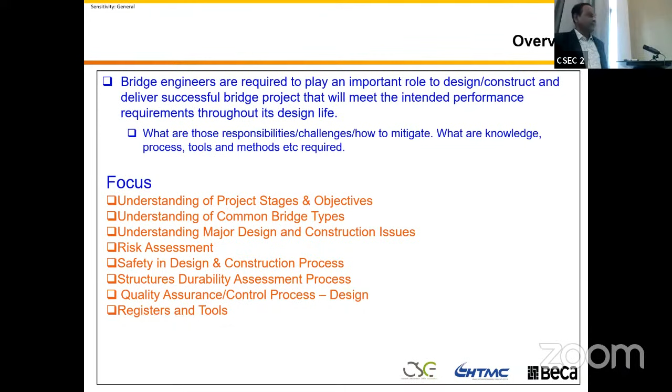So before you hang the photograph, you need to find the photograph. Someone has to draw it, right? There should be an artist, like a client — this is the client as well.

When you buy the photograph, you need to have an agreement. You can have an easy agreement between stakeholders, but it's very difficult to have agreement between us — trust me, you'll get to know this someday from your own experience. This agreement is really hard, deciding which one to buy, because otherwise you buy it and I don't like it, and I ask you to change it to what I want — there will be issues later. There are stakeholders, and you need to get their agreement.

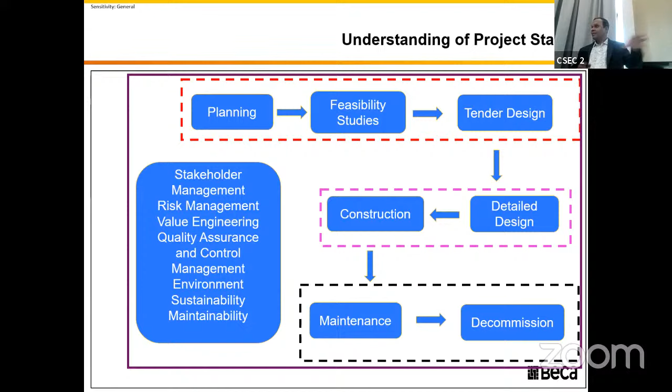These are the main elements in the project stages: this is the procurement stage, this is the design detail stage, this one is the maintenance stage, where the people are going to use it. If you look at the photograph story I mentioned before, you can link the same thing here, but on a larger scale. I just put this slide - we have seen this before as well.

When we were doing a project, you need to understand what the objectives of the project are, especially for a highway. When you're building a highway or roads, the main purpose is to improve road safety - please remember that, that's the main purpose we are doing. And then improve the efficiency of the highway between proposed destinations - efficiency meaning you can drive safely without difficulties like traffic jams, and reach your destination as quickly as possible.

Then, when you are building bridges and roads, you could see around the country the economic development. Especially you can see between these highways opening up in the country, economic development, like especially land values - they go up like tenfold, I don't know how much, but yeah, it's really the impact on the economy.

And then when you design everything, it needs to provide value for money. So you can't spend 100 million if you can build it for 80 million - you need to make sure you build it for 80 million.

And enhance the potential beneficial economic effects, manage potential adverse environmental impact. Because, for example, when you're constructing something across a river, you can't just go and build a dam or something. You can't go and put all the piers in the bridge, like 10, 15, 20 piers over the river in the waterway. You need to make sure that river - people use it by boat, sometimes, not common in Sri Lanka, but in most countries they use rivers to transport people. Sometimes they allow ships to go under the bridge, so in this situation you need to make sure you consider those things.

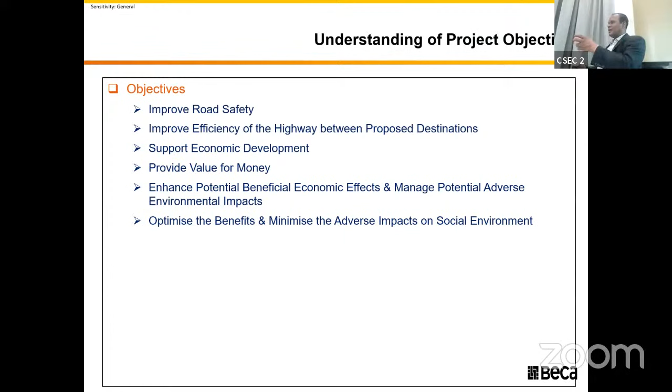I'm giving very simple examples, not very complex ones.

Then when we are doing the work, we are always bound by the contract. So the contract types we use in design - we call it design-construction type. Construction to the client design, you do a detailed design, and then there's the alliance between the designer, contractor, and the client.

A client work together alliance. The other one, public-private partnership. This project is invested by the company, private entities. For example, you heard a lot of talking in Sri Lanka that foreign countries would like to invest for the elevated highway, but they collect the money from the toll. You have to pay the toll. So those investments, and then you need to work.

So what I try to say in summary, when you design anything, it's a different level when you become a senior engineer. Then you have to deal with this kind of documents, the contract documents. You need to make sure that your design and your compliances always comply with these contract documents. Sometimes you start your career and you do calcs and designs, but when you go up in your ladder, you have to deal with them. In the office, we deal with them. There are a lot of issues that come up. When you try to solve them in court, it's going to cost you loads of money. And in addition, there are a lot of risks associated that you will see later on how we're going to mitigate.

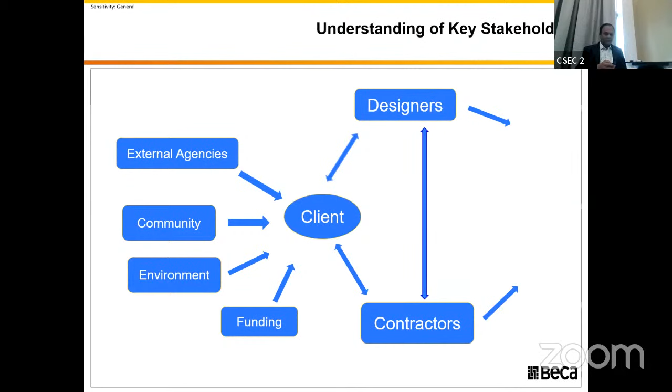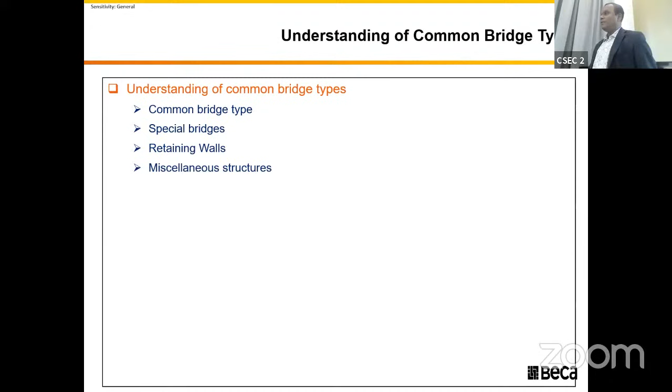I'll just put this slide, understanding common types of bridges. You should know what you're going to build first. But I'm not going to go into this in detail, the simplest form, because in my bridge design lecture series we covered this in very detail. For the sake of completing the presentation, I included them here.

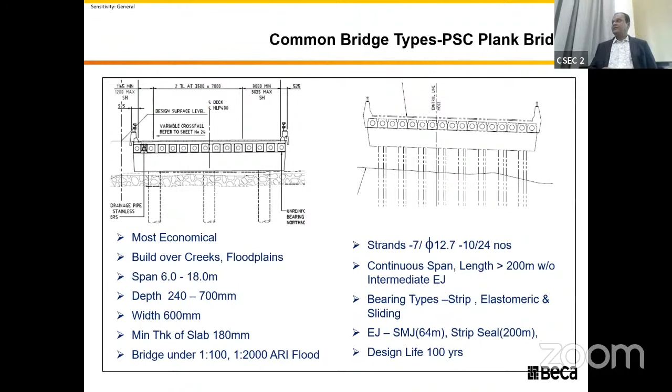The common bridge type, the simplest and cheapest form, is the PSC plank bridge. You can see it can go up to a few hundred meters in length, even kilometers. In terms of construction, design and cost, this is the cheapest form of bridge.

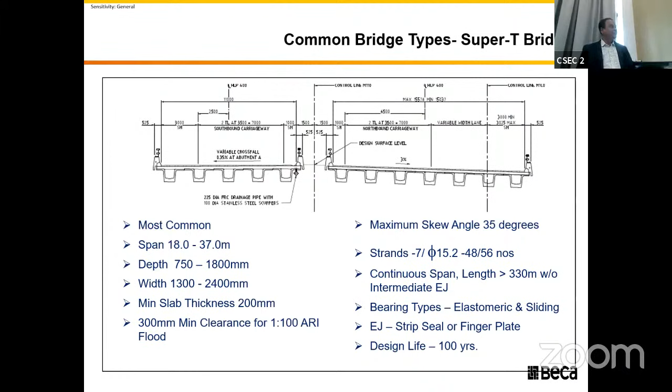Then I-beam or Super T bridges. This is very common in Australia, one of the most common types there. 78% of bridges are designed using this method. They use the longest one, I think a 3.5 kilometer long bridge, using Super T with a 30 meter span, up to 120 plus spans in the bridge.

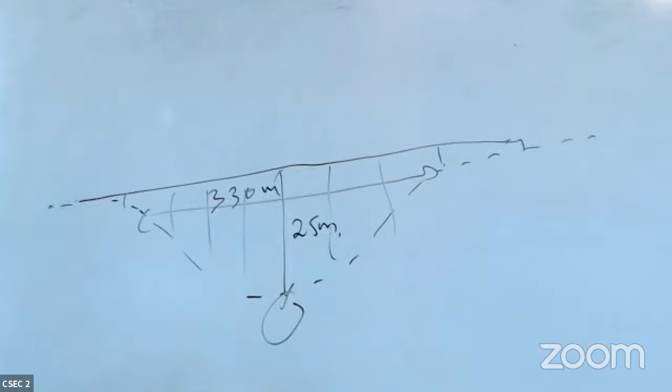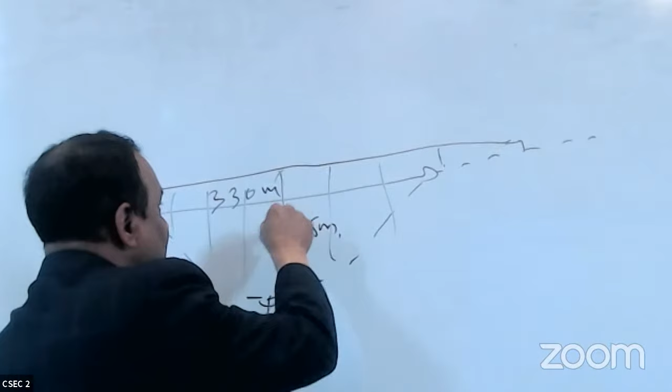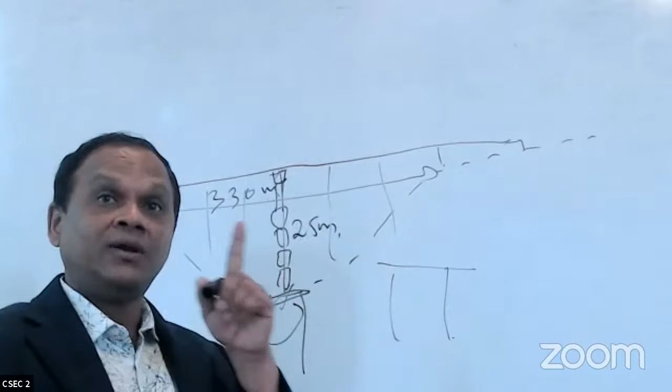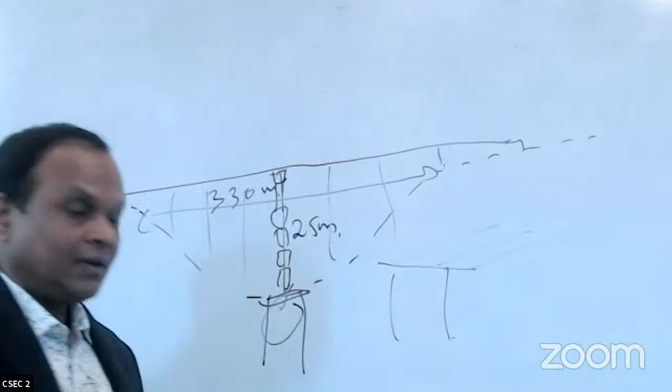So you need to bring the machines in here, right? Once you bring your machine, you do your pile, you do your footing, you go up the column 25 meters high. When you are doing here, you're all good. Then you go to the top, you have your cross beam like this. Once you are building the cross beam, people are working 25 meters above ground - you need to make sure they can construct this. So once you construct that, you need to erect the girders like 25 meters above the ground. You need to reach them.

That's what I said - bridge engineering or any engineering you deal with, like designing a very tall building. It's okay for a 2-story building, but when you go up you can see the logistical issues you are facing, the interfacing issues you are facing. You need to make sure you consider all of them when you are designing.

But I try to say, listen to your mates - they're from geotech, they're from drainage, they're from utilities, they're from highways, they're from services, they're from urban design. You have to listen to your architects too - they may say we need to have this, it's a heritage issue, you need to put that stuff on the bridge.

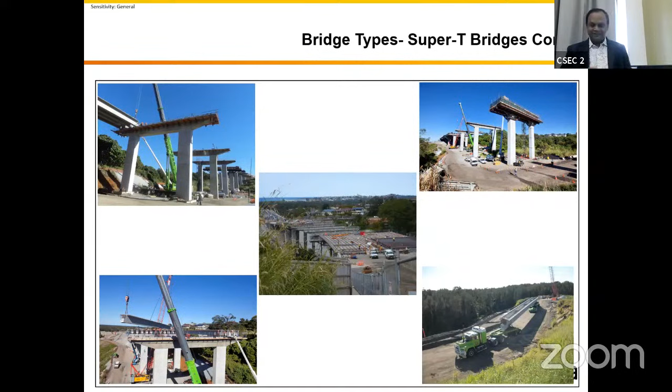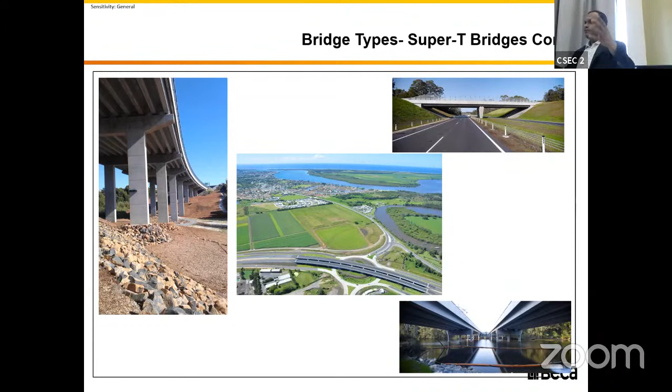You can see how beautiful it is when you build something and it matches with the surrounding. Yeah, that's what we need.

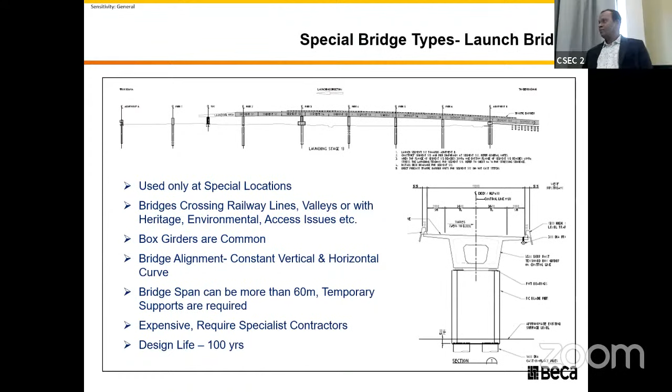It's a massive process but it's a very simple thing - you build the bridge and you push it. It's like pipe jacking, you heard about pipe jacking? Exactly the same thing - pipe jacking does it underground, launching bridge does it above ground. There's a difference, but the principle is the same.

When you are an engineer, always think about what is the basic principle we're going to apply. Always think about this - this guy came and talked about hanging a photograph all the time. That's a story you need to take home.

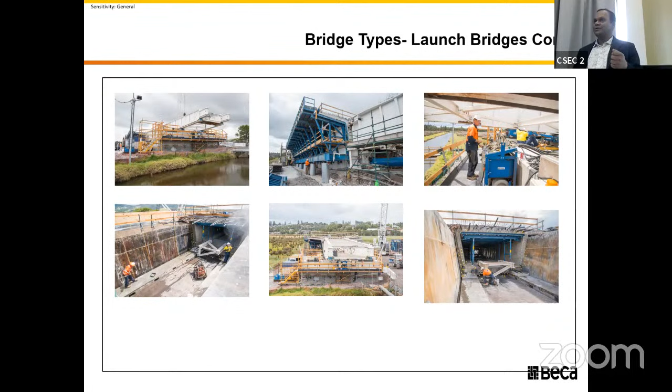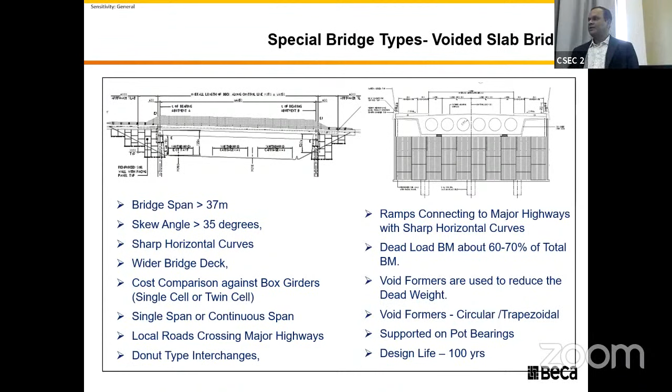This bridge type I never recommend - in Sri Lanka you're never going to use it. It's called a voided slab bridge. In terms of current sustainability design requirements, we can't use them because these bridges are very heavy and need a lot of concrete and a lot of prestressing tension. This type of bridge is still used in Australia because of the labor cost, but it's not the one for Sri Lanka, though I still include it. The reason is, if you go to sustainable design, from the list of bridges you propose, they will take that one straight away off your list.

Then you can go to more complex bridges. I think you've already seen the one now over the Kelani, near Parliament - a beautiful one, right? A cable stay bridge with a balanced cantilever. I think you've seen this kind of interchange while driving on highways now in Sri Lanka. In the future we need more - yeah, you can design these.

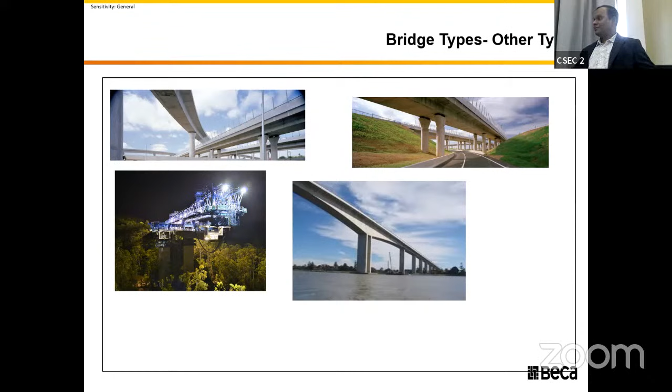When you are designing bridges - not only the bridge, but the highway project - it's always a cut and fill business. Our highway engineers, when doing the design, try to balance out cut and fill. But when we were constructing a bridge, we needed to excavate a certain area. This particular project, we had to excavate about 20 meters maximum depth, about half a kilometer in length.

So we needed to identify how to excavate that element. This is about 30 meters wide, and this is the rock. We need to come up with the best possible retaining structure solution to solve that problem - otherwise it's very expensive.

Like in the city, when you're designing a building and you go to the basement, you keep going down to get the car parks and other amenities. When you are building, you're constructing right next to another building, so you don't have land to play with. Then you have to go with the best, most robust design solution, like a contiguous pile wall.

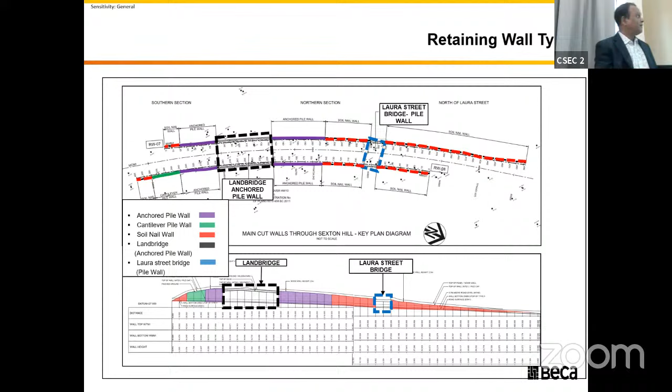But for example, in Sydney we are very lucky - we got sandstone everywhere, you can cut this shape like cheese. It's very easy, and it's cheap as well. You don't want very expensive retaining structures. In this project, we have many retaining structures.

One of the newer retaining structures, which you may not have seen many of, we call the soil nail wall. It's very easy - you excavate the soil, you put a nail, and then shotcrete. Think of it like this: if you want to attach 4 or 5 pieces of paper to a wall, you glue it and nail it. But if it's a piece of timber, like a series of photos, you have to nail it to attach it.

So when you are excavating the wall, here's what happens: when you excavate, this bit of the soil is unstable, it's trying to fall down, and this nail will hold it back. It's like when you cut a tree, put a rope on top, and pull it down - same principle we use here. We have that lifetime experience, that's why designing this stuff for us is very easy.

Go and try that one at home. Yeah.

Make sure your parents make all of them insured before you do that.

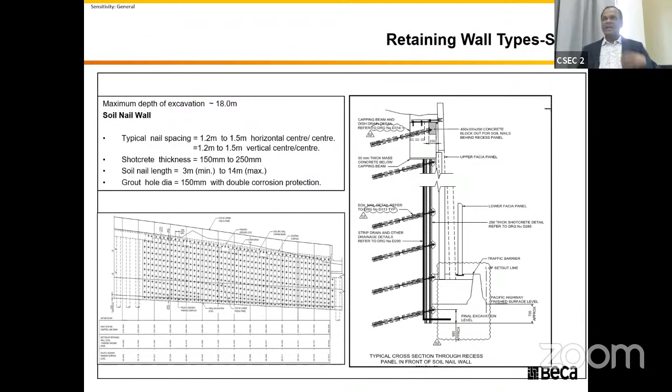Right, and once you keep going down, you can excavate this and keep adding the nail. This design is the beauty of collaboration between structural engineers and geotechnical engineers. This is one of the cheapest retaining support solutions for deep excavation. Wherever possible, we use this solution, because you excavate, drill a nail, put shotcrete, drill a nail, shotcrete - you keep doing that. So you don't want to build a massive contiguous pile wall and anchored pile wall system. This is the way they build it. You can see it's drilling, this machine - 1, 2, 3, 4, the 5th one they were drilling.

We designed this one with a 150 millimeter diameter hole, drilled at a 15-degree angle. You can see this is the retaining wall, we use galvanized steel for the soil nails, but in addition we use a double corrosion protection system to make sure this retaining wall lasts a minimum of 100 to 120 years without any maintenance.

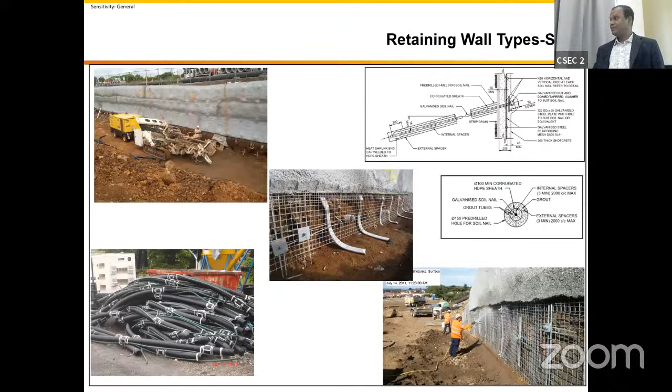Another type, used in some motorways, is what we call the reinforced soil wall. We use soil nail wall for excavation, for the cut, but we use reinforced soil wall for the fill. For example, in this picture, you need to elevate your road, so you need to fill. When you are filling, this is one of the cheapest forms of solution - the principle is what we call mechanically stabilized earth or reinforced soil wall, different technical terms.

If you think about this, the design principle is like a rigid block retaining wall - you consider this whole thing as a rigid block. In retaining wall design, what happens is very simple. Geotechnical engineers always talk a lot, but they do a very simple calculation.

You get soil pressure in a triangular distribution, and water pressure in a triangular distribution too. This force will push this one that way, or else it tries to rotate it. If your weight is good enough, it can develop restoring moment. The weight is sufficient and the friction between the surfaces, soil to soil, will prevent this one from moving.

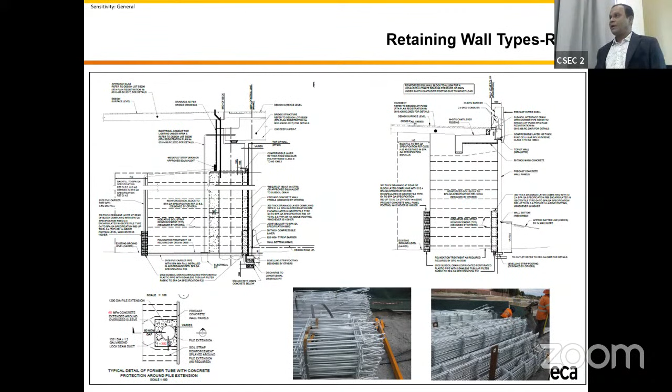The performance of this particular retaining wall mainly depends on the quality control and quality assurance of the site - the type of material you use is very important. You can see this picture while we are building this retaining wall, the type of material - this looks like no-fines concrete here, just roller compacted. It's very important to make sure of this, otherwise the system will collapse because you've got a lot of water building up in the back. Over the years it will slip, and once it slips it will take away the rest of the soil retained behind it.

Once you do that, you get a nice outcome here. Other structures - I think these are not common - are arch bridges, culvert arch bridges, the precast arch.

Is it common in Sri Lanka? Underpasses - yeah, and because of safety and other reasons, now it's not common.

Are they because of the unstable force? Yeah, that's one reason they don't allow it. We know they are not common. Yeah, and there are safety reasons too.

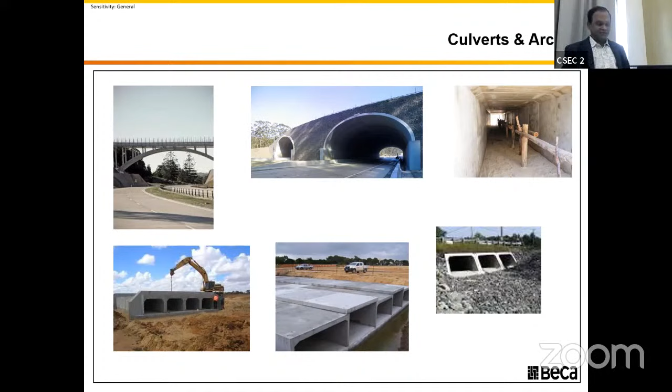Yeah, you have a lot of box culverts we use. This is one of the cheapest forms of construction, anywhere, because it's much cheaper than building bridges. You put this shell, then you put a link slab on top and backfill. You can backfill up to 15, 20 meters above this level. Some very, very strong structures—because it's a shell structure, right?

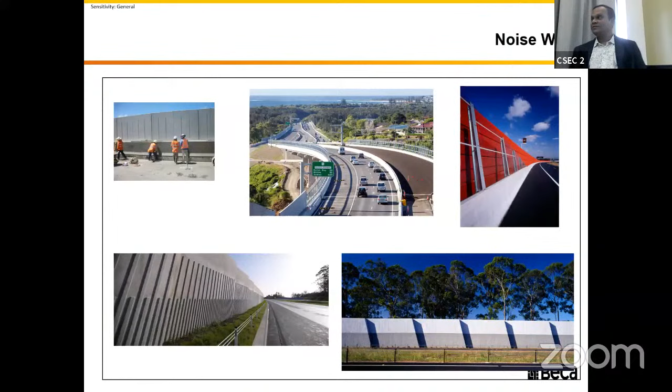And this is the other road furniture and so on. The noise wall—sometimes you might see in some highways they put up noise walls. And another thing, quite common especially in highways, you have to put throw screens, because people might throw something when you are driving underneath.

If it hits your windscreen, sometimes people might die, because if that impact happens, the driver is going to go uncontrolled, then he might go and hit someone else, right? These are very important—these are the minor things.

When people design a bridge, you think the most important thing is to design the big girders, right? That is the bridge design—that's nothing, you know what, that girder is never going to fail. Trust me, right? Even if you under-design a bit, it's never going to fail. That kind of safety is built into there, right?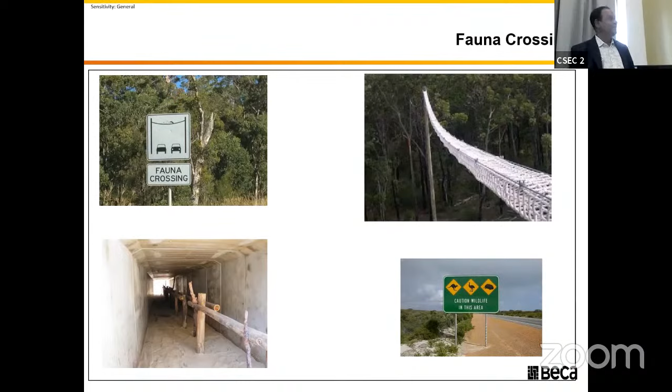I'll stop that part there, then I will go to more of a qualitative kind of discussion later on. Any questions up to this point?

Yeah, we do a risk assessment. For barriers, we have 3 basically: low performance barrier, regular performance, medium performance, and high performance barrier. This is related to what we call the MASH test, because they do a real-time test with a certain truck at a certain speed. Those MASH tests categorize TL 1, 2, 3, 4, 5, 6. For example, the medium performance barrier is equivalent to TL5, and the regular performance barrier is equivalent to TL3.

I don't have this information with me in this presentation, but I can send it. We can do a risk assessment—in my presentation I discussed that in detail in the bridge design one. We do a risk assessment, then we can decide which barrier is suitable.

For example, if you design a car park, let's say we want to design a barrier for that car park here, because if someone drives through, he will end up in the creek or water down there. To protect that, we can design to suit, because when you're driving in a car park you're not driving at 60 kilometers per hour, it's about 10 to 15 kilometers per hour—sometimes maybe he didn't put the handbrake on and the car might slowly roll. So the impact on the structure is very different compared to a road traffic barrier on a local road versus a highway, where we allow you to drive at 100 kilometers per hour.

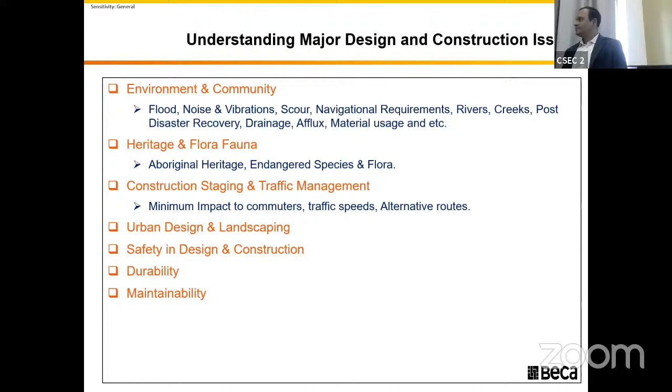There are a few questions from the audience. The first one is: what are the standards widely used for building bridges in Sri Lanka - BS or Eurocode? Eurocode is what you see.

The next question - someone says currently I'm working as a site engineer in a bridge project in Sri Lanka. In my project, we are using temporary sheet pile shoring to retain the soil and provide a safe environment in deep excavation. I think it's more of a statement than a question. He's just stating it would be very useful if I could know the quality and standards for temporary sheet pile shoring.

Temporary works design - there is no standard. The main reason is no one would like to write that because of the risk. If I write a code myself, and someone uses it, and if it collapses or fails, they will put me in jail for the rest of my life. As simple as that. Because of that, there's a massive risk involved.

Another thing - temporary work design varies place to place, person to person, contractor to contractor, client to client. There is no one way, one solution. Because of that, we design the temporary work for that particular case.

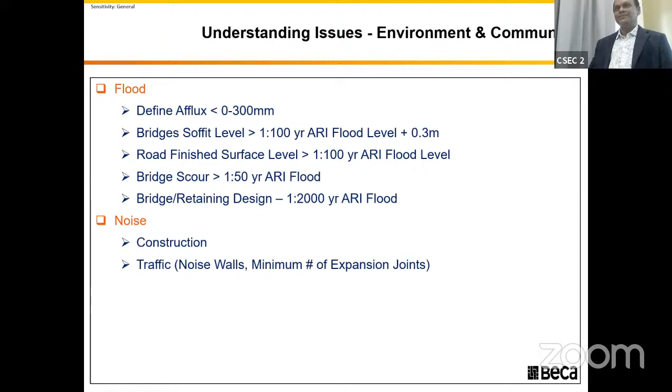Everything costs, that's what I need to say. You can't expect in Sri Lanka for us to do the same thing because we are still growing up. I'm sure when you all come to our age, you can do this stuff and learn how to do it, so we will help you to go.

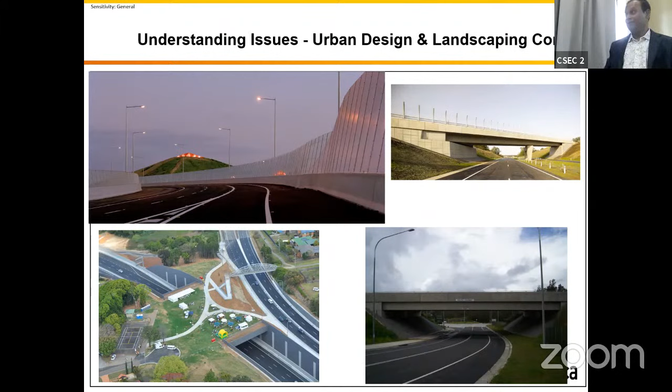Then the next phase of the work, I just want to touch base with risk. Everything is a risk. Even for you guys, having a girlfriend or boyfriend is also a first time, not like our time. Married close to 28, that's the new generation, right? So we are the old generation actually, but you need to understand we grew up in technology and everything, so we are a matured generation, and that's the way we need to choose.

When we do a risk, everything is a risk. Like the question asked, when you go and work with insurers, they ask what is the lifespan of the particular structure. You need to understand first what is the project life cycle of the structure - starting with concept development, design, and then continuing until demolition and recycle.

I think in modern day design, you need to make sure you estimate the amount of carbon you consume in your particular design. I think you'll learn about this a lot from Professor Priyan. I'm not going to go into this one in detail, I think I covered it in the first slide.

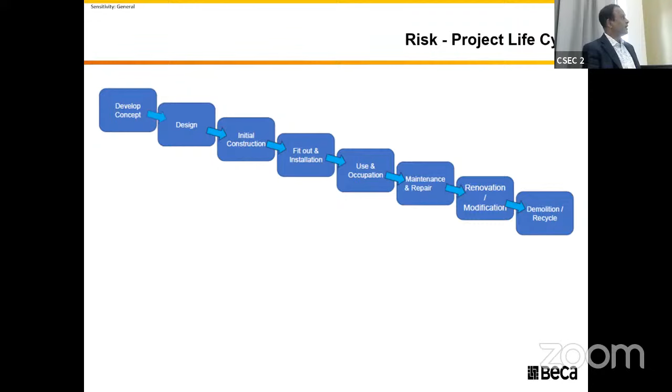When you're doing the risk management process, there's a standard we call ISO 31000:2018, which provides risk management principle guidelines. You need to first identify the risk, assess it, control it, and then monitor and review it.

I'll give you a classic example - how many people drive? You face this every day. While you're driving, someone crosses right in front of you, it's a hassle, you need to mitigate that. Even if you're sitting in a car or bus, it's still the same. If you're crossing at a traffic light location, someone can drive through the red light and hit you. You get injured, and you don't know the consequences - it could be minor, it could be fatal. That's the extent of it, so when we do engineering, we have to assess those risks.

For example, like I said about that Boga story - it's a massive risk. Imagine you ask a company, a foreign investor, to come and do that road. They get designers to design it, and the contractor's procurement forces select the one. Once you're about to go through halfway, someone says you can't go through that road anymore. It's not that simple to take a U-turn or turn left or right to come back and connect. That's a massive risk you have - that's one common thing, that's a community issue, nothing to do with engineering.

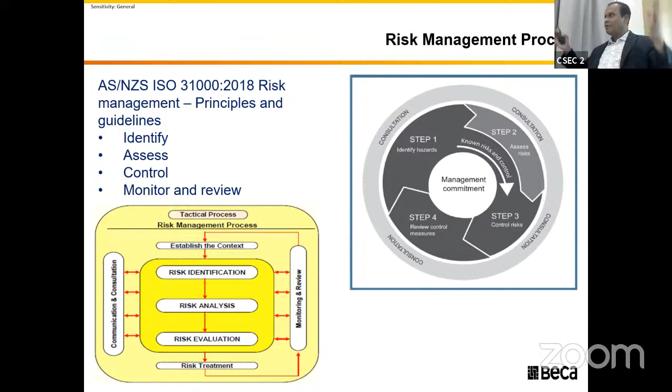When you do the risk assessment process, especially in engineering, we have a hierarchy: eliminate, substitute, isolate, engineer, admin, and PPE. PPE you know that. What is eliminate? Can you remove or not introduce an existing hazard? Can you remove it 100%? In terms of engineering and risk, you can't do that - you can't 100% remove a hazard.

No, but still, that's what I say - the classic example, like Sri Lanka, they clear the road for them to go from A to B. People think there's no risk, but it's still a risk. It could happen - you can't find a road without any pothole. It could happen, you can't eliminate it. If you say you can eliminate it, that's highly theoretical - you can eliminate maybe 99%, fine.

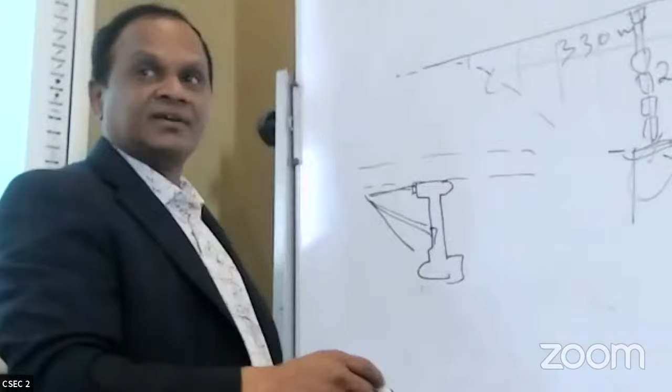So the other option, you can engineer additional safety features built in. For example, when you build a bridge, you've got the cantilever segment. To construct it, you need a V shape, two angle lines, to attach the cantilever system. Then you put your slab. In Australia, the way they replace this is the common construction. There's a risk when you are doing it, and that's the intention of the security.

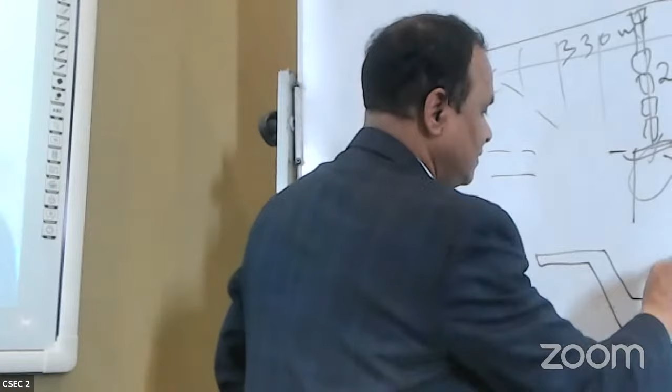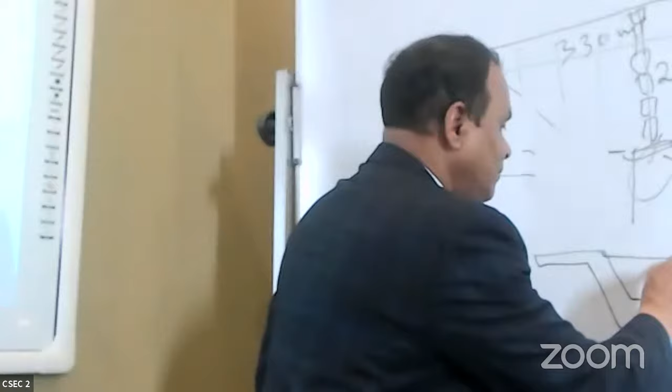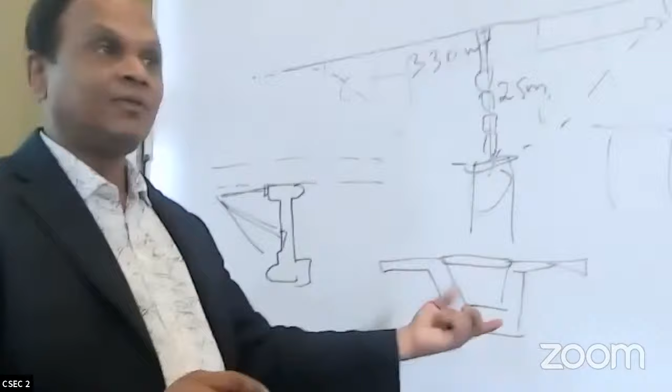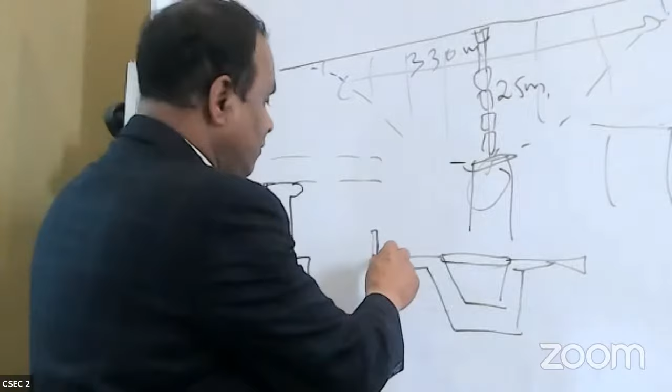This plan is your cantilever section. On the ground, this one we put permanent formwork. So once you place the bridge beam, you have a walking platform already, and no one is going to fall down. When you pour the concrete, you just need only the edge form, and we also provide bolts and ties to it.

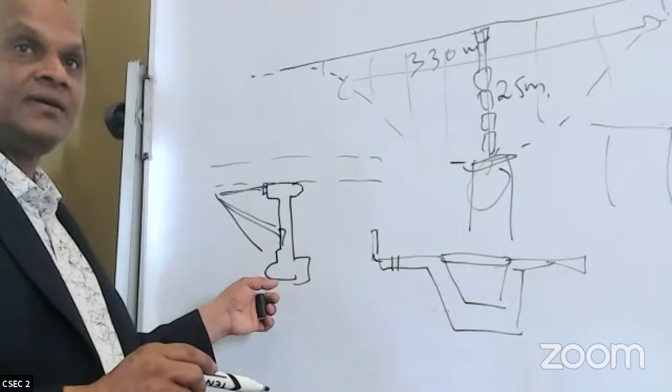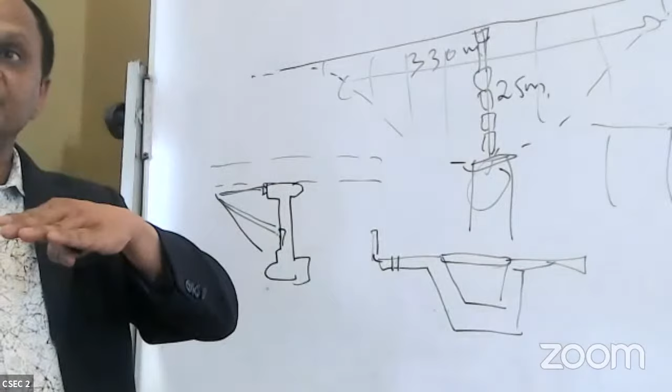In this one also, there's a risk to people. If you compare these two solutions, this one has a higher risk. To reduce that, you can provide brackets and things attached to the precast beam while constructing, reducing the risk rather than a person attaching that in the air. You can facilitate that, put beam posts.

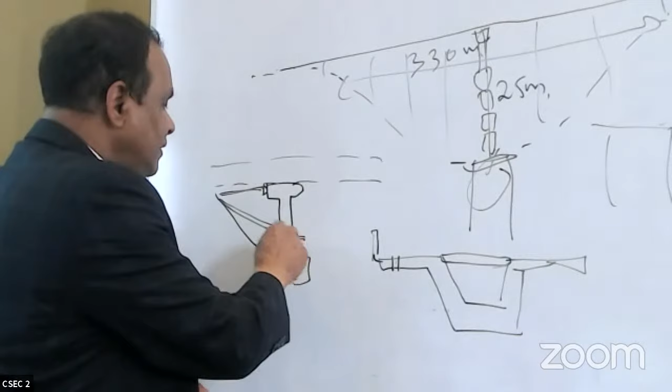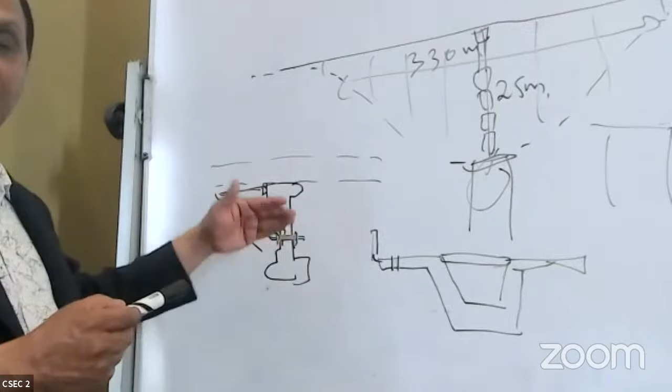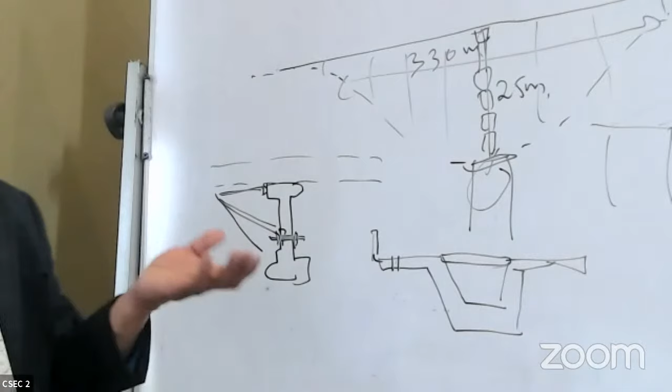You can put the rod in there and tighten that. You can connect this one as well. Then you can design it, place it in a proper way, and reduce the amount of work you're supposed to do on top of the deck. This is how you reduce the risk - you are not eliminating it, you are reducing it. This is the balance you need to look at when designing and assessing this.

I'm giving very simple examples. This is the engineered solution - we use this I-girder replaced with the super T beam as an engineered solution. Here, it does the same thing, acting as a bridge beam. I'll let the traffic go on top. Yeah, the super T, here.

We use the cement fiber sheet. Only one project I used plywood, but the next ones they use a lot of CFC sheets. But there's now again safety issues - when you cut the CFC sheets, the dust is cancerous. Then we can hopefully go back to timber again, you can see, right?

That's what I say, you can't eliminate it. CFC is okay, good, and durable, but when it's cut, it creates dust, and the workers' health is at risk. If you put timber, it's cheap and does the job, but later on it might decay and fall down into the girder. It could happen over the years, but still nothing will happen to the bridge because the load will be taken by the bridge deck. That's why we provide enough reinforcements, but still they think you must not be complacent. There will be a balance, and later on they might say you can use it, or they might come up with a polymer or something.

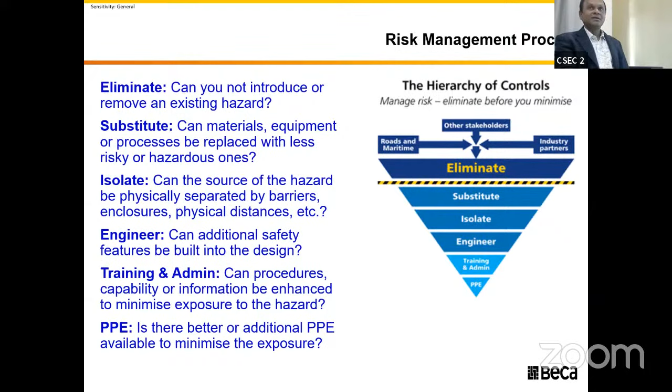When you do the risk assessment, like we discussed, we look at the likelihood, the probability. The classic example - when the green light is there, you can walk across the road, but I've seen many places with no green light, people still walk across the road, so the likelihood someone is hitting you is very high. When there's a green light for you to walk, you walk, and someone says no one is going to hit me - you agree? Someone can come and hit you, but the likelihood is very low. These are the two extremes.

These are the two extremes. What are the control measures we identify in this scenario? The people crossing the road in a safe passage - that's why green light. The other people crossing the road in an unsafe passage, anywhere they like.

Thankfully all the drivers in Sri Lanka are very good, quite patient and conscious. I encounter many - they jump across the fences and go across there, jump and then go across. Imagine when you jump, if you just lose focus, someone is just driving through. The people should not stop - they also drive. If you stop, someone else behind you will hit you.

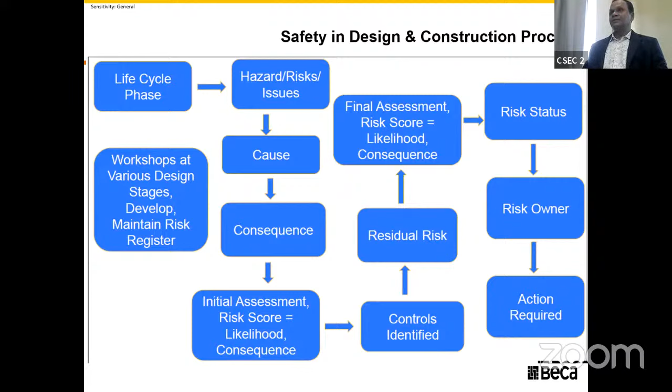When you do the risk assessment, we always have numbers. We engineers always play with numbers. This numbering system - you can say if an accident happens, it's insignificant, no injuries. The way you define no injuries: the first aid box we have in our offices, someone goes and uses the first aid box, or no treatment at all.

And then that could happen - likelihood is extremely likely. For a certain project, certain element, I'm not going to go into this in detail, it's very subjective. Some people put this one like a timeline. Some people put this as certain risk assessment cost - you will see in the next couple of slides. So then very likely, unlikely, significant injury, fatality.

So in this scenario, when we get this table, we categorize our risk into high risk area, medium risk area, low risk area. If you design your formwork system or a stair to climb up properly, and a person fell down from that - sometimes as you come down a couple of floors, it's extremely high. Sorry, the incident happening is extremely low, but it could be catastrophic or serious.

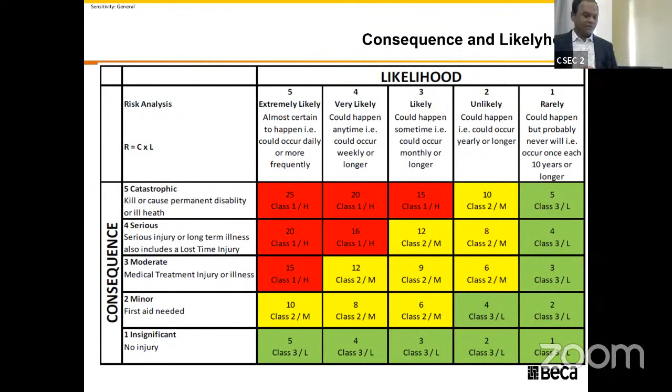This is something we need to teach when we are in school - not up to that extent, but the principles and concepts. I'm going to go through this one - these are different criteria we use to evaluate risk.

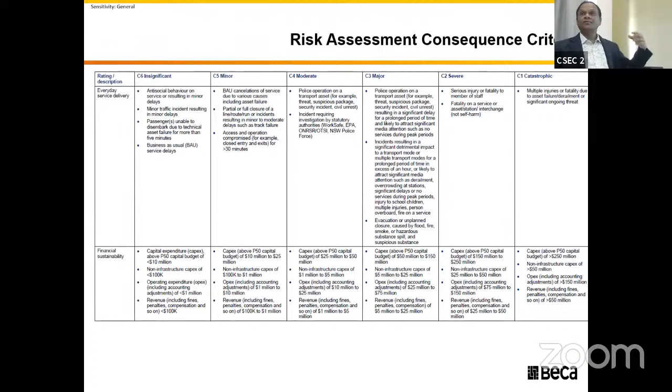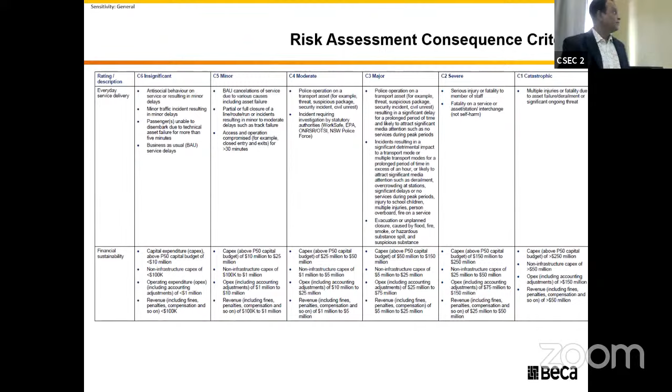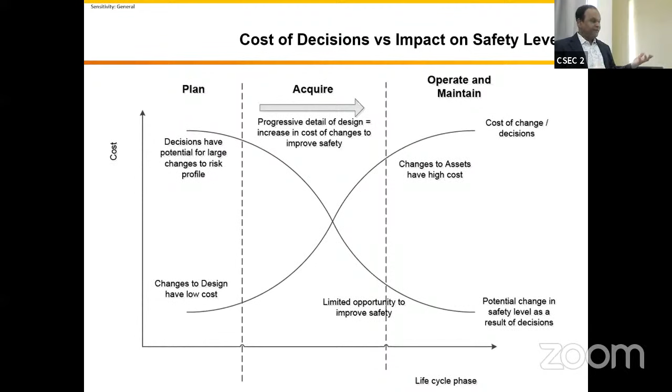Different categories - safety, and when we do the delivery, finance, like insurance, we deal with numbers. These are the criteria we use to assess the risk and manage it, because at the end of the day everything we translate into dollars. That's why we do it - so you get proper decisions in the risk assessment throughout the design life of the structure, and the life cycle cost of the structure stays very low. If you don't consider that, that's where you're going to end up. That's why engineers in the Western world are so conscious about risk assessment - not just to save someone's life itself, but for their own benefit. That's the advantage. We need to take this seriously and get that across.

It's almost 5 o'clock, right? So what should I do - can I continue for another 15, 20 minutes, or do I need to stop here?

If there are issues - for example, when building something close to the sea in Colombo, your exposure classification according to Australia is B2. You have to provide future cathodic protection provisions, meaning in the future you can pass electrical current through to reduce corrosion in the steel. To do that during construction, for example with a pile, you have to tie all the reinforcement together, because otherwise current will only go through one place. You need to identify that, incorporate it in the design drawing and contract documents, and maintain it.

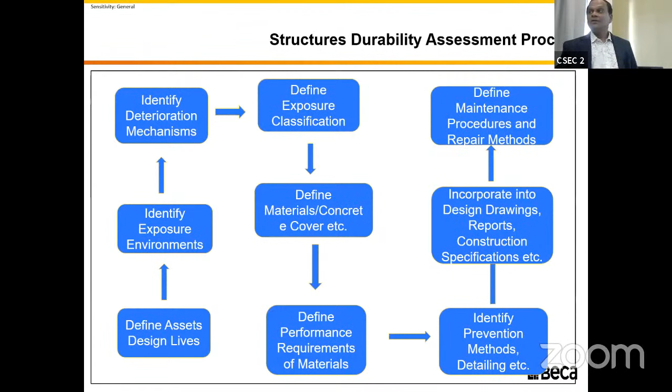This is contractually how we define design - a bridge is designed for a minimum of 100 years. But if you design an elastomeric bearing, it's only 35 years, because the bearing is always subject to unforeseen vertical load, horizontal load, rotation, and so many other things. There's a lot of risk associated with that. According to experience, it lasts between 25 to 35 years.

For concrete structures, if you have safety rails with protective coating, like in the railing, that's only 15 years - it's galvanizing, so these have a low design life. But the rest, mostly, we get a 50 to 100-year design.

They do inspections, but in terms of bridge performance, like the small joint seal, they need to replace it, and the bearing surface too. But a major element like the bearing at 35 years - you don't want to do that, because it's a really big cost. In a highway, when you replace the bearing, you can't stop the highway. If you stop the highway, you can see how much money they're going to lose - everywhere you drive, they don't give it free, it's 150 to 250 minimum.

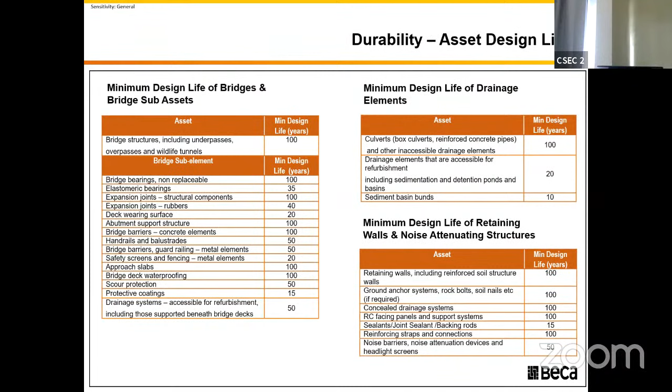For the replacement of the bearing - we replace all the bearings together, because for example if you get a 2-span bridge with 5 girders, you get 20 bearings. So when we want to replace them, we have to design for this at the beginning, because when you replace the bearing you have to jack the bridge. When you jack the bridge, you have to jack from the cross beam at the center. You need to jack from that point, so your girder will be cantilevered - the girders stay on the line, with the cross beam and deck, and they bear the replacement by jacking from this point.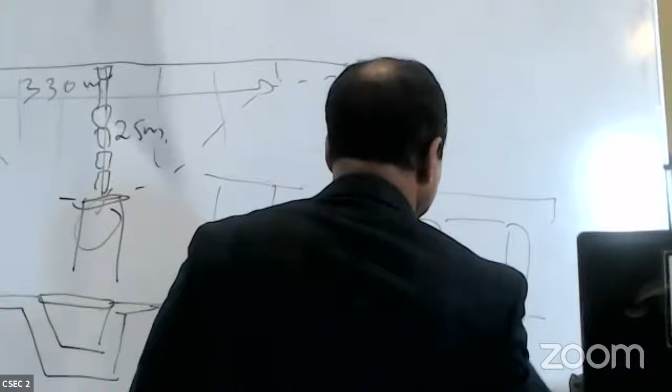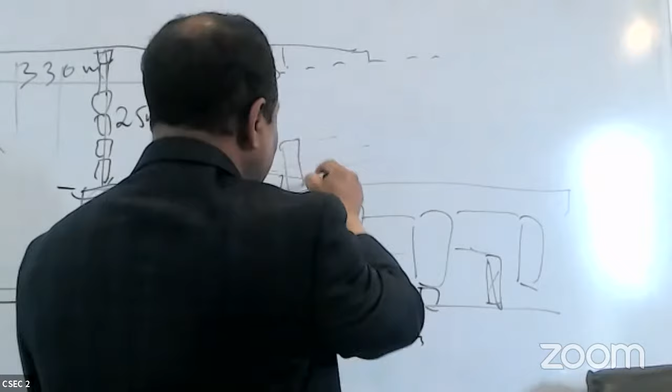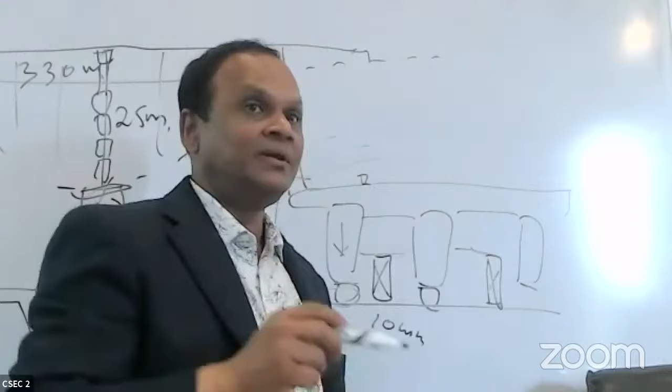You see, when you jack the bridge up, it's about approximately 10 mm. This whole way, including the barrier, is cantilevered. But we still let the traffic go. Normally we close the shoulders and reduce traffic speed, there we reduce traffic speed from 100 to 40 kilometers.

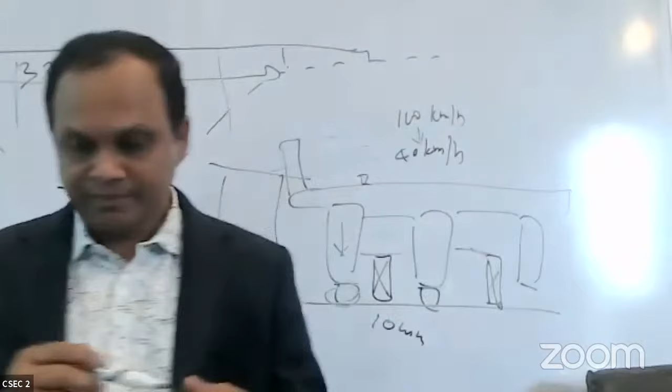Because it doesn't matter in a highway, while you are replacing a bearing, you just on one bridge reduce the speed, so you are driving 100 kilometers per hour long distance elsewhere. But if you stop the traffic, it's a different story. Nobody can drive through that. You have to pass through that. The highway should be designed for this scenario.

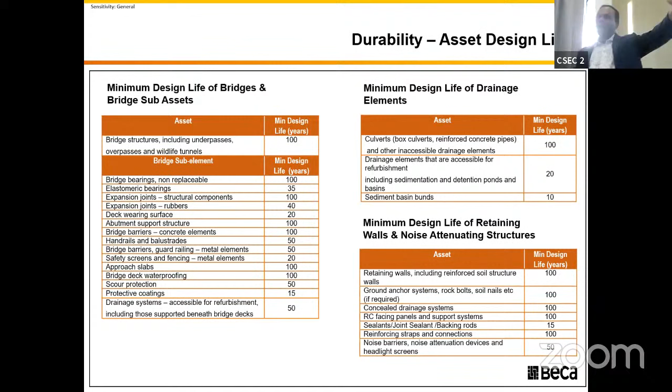This protective coating and things, you can close one lane and do it, but bearing replacement you can't do with closing one lane. That's very important. All other things you can do. Deck wearing surface asphalt, you can lay halfway through, you can lay the other half later. You can manage that with reduced traffic, managing the traffic.

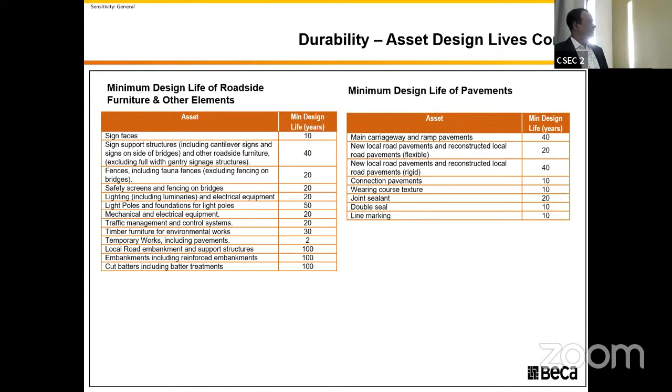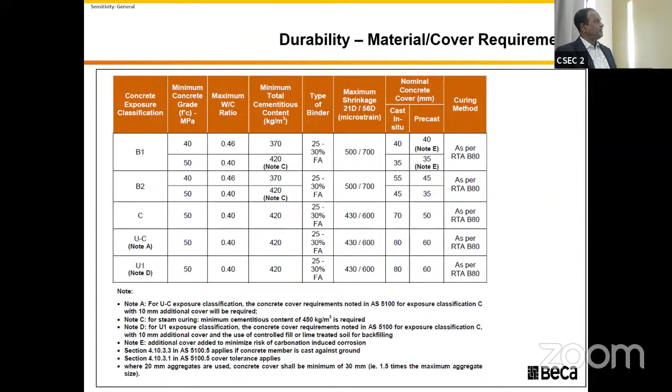These are the design outcomes. We identify the type of exposure classification, concrete, the mix design, cover requirement, and how to build them.

And the quality control and quality assurance is one of the most important things in the design and construction. They are all governed by many processes. One is the contract document itself, written down what you're supposed to do. Specification - when you build to a certain specification, 7 days concrete strength is 40 MPa, and you are supposed to do testing.

One batch can carry only 5 cubic meters, then you need to test that one - you can't just say same supplier, that was all right, and keep pouring. No, you don't do that. It is every batch - you take the temperature. There's another huge part we do in it.

So you need to have a QA, QC process. The way you need to vibrate, right? So there are so many things we've written down in the specification - tolerances allowed in the construction. It's all governed with the spec.

For the quality control and quality assurance processes for the designs, we have a design process. For example, you design it, your senior engineer is going to review it. When he thinks it's okay, then you send it to TD. You do an overall review, he thinks this design is good. Then issue for third party to review that - an independent verifier or the proof engineer.

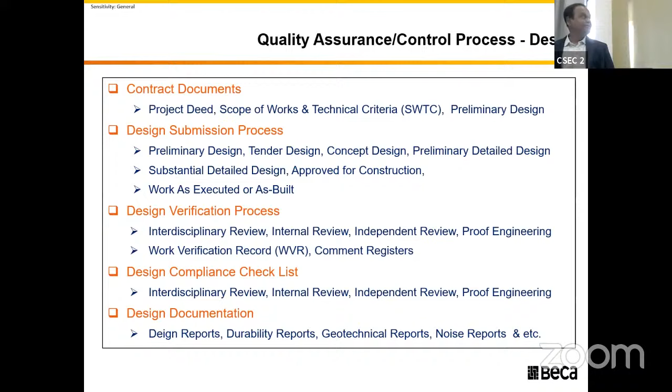But these documents and these processes are governed by them. Even in construction, the specification, method statement, risk assessment, RFI and NCR process, safety, and this auditing is always there. These are the mechanisms they set up to make sure that we deliver the product and perform the intended function.

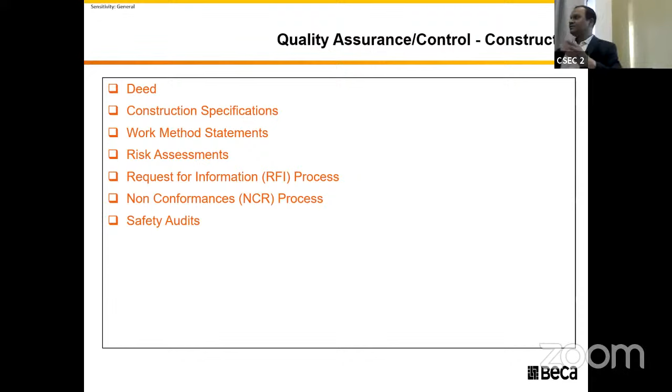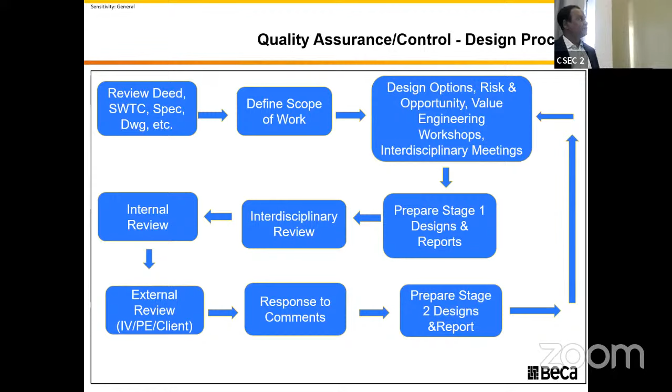There are a couple of words I mention all the time - these are the quality assurance and quality control processes. You all can go through them. If you have questions, you can write to me. I'll just skip through these slides.

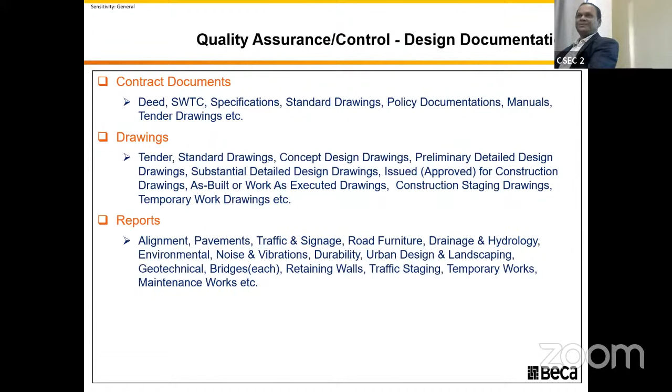And then you've got documentation - spec, drawings, reports. Reports are a very important thing. I suggest Shiromal start that culture here. I can give examples to let the engineers become more familiar with writing a report, to understand the contractual requirement - not only what's in the standard, but other requirements, like interfacing - then you document that. So then someone works here and leaves to another organization, and the person who is picking up really knows what exactly that person did. That's very important.

We normally document everything - issue registers for small issues, you put in the register. Sometimes you need information from a client, or from a stakeholder like a service provider - say the electricity board. You have a conversation with them, you put a date and they didn't send it to you. But if you keep those documents, dates, agreed documents, agreed dates, emails - that's contractual evidence that you did the right thing and they didn't comply. That's where we're doing it.

Risk register, compliance register - what is the compliance register? That's the contract documents you need to list up. For example, type of barrier used in the bridge - the client always says we need a medium performance barrier, a TL5 barrier. Then you need to say yes, we use this one. This is the section of my report, I document that. This is the drawing, you can go back and see.

Someone might say in the audience, why do we need this? It's already in the drawing, we need to go back and read it. No, we don't do that. If you go through that document - this is one example - there are thousands of things you need to check. Then you will find I never missed out anything.

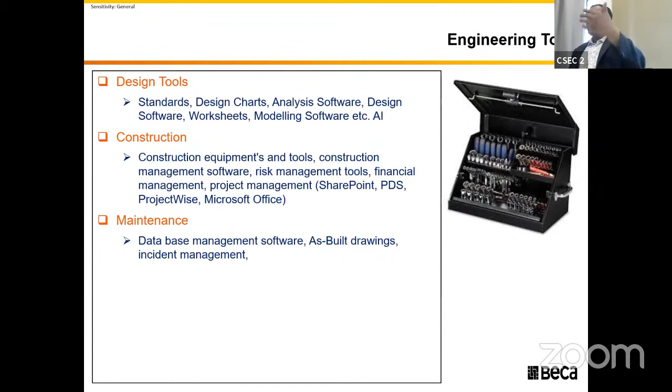The conclusion to my presentation - I'm going to conclude like this. For engineers to understand, you need to understand the overall process. You should think out of the box. Understand a bridge is designed to stand for unforeseen forces - not just what's in the code, but beyond that, floods, environmental factors. It should stay over a century, used by future generations. You are designing not just for yourself.

Not for you guys, right? Understand you are spending for your own, your children and grandchildren, as the future. It's very important. Someone else can do wrong things, but you should not. You think beyond and enjoy what you are doing and building. This is why we still love this profession. Otherwise, we don't want to do that sort of thing. We can retire, we can go around and enjoy our life, but still, we love to do this.

Because we enjoy it, I really enjoy talking to you. So that's all about it. So trust me, if you are a good structural engineer, design and build around, it will be coming up everywhere, especially in Sri Lanka. You go around, you look around, you can show it to your friends. You can talk about it, the rest of the people can't.